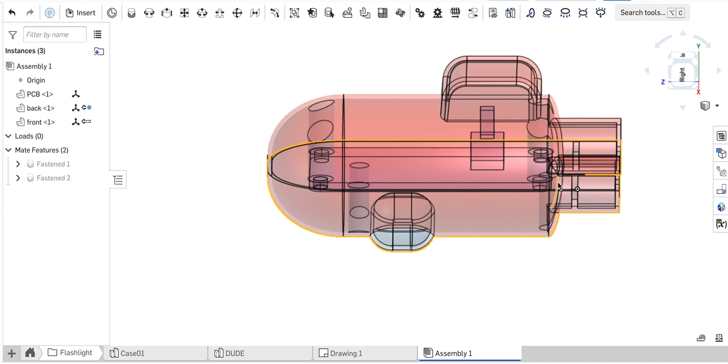So another great tip here, using a drawing to help you decide how to create your parts. So if we come and look at the assembly here, you will notice that the button doesn't quite match up with the backpack, right? It's a little not centered. So in my mind, I want to move the backpack up higher, so this is more centered. Okay, it's not very much off, but you know, I want it to be a little better.

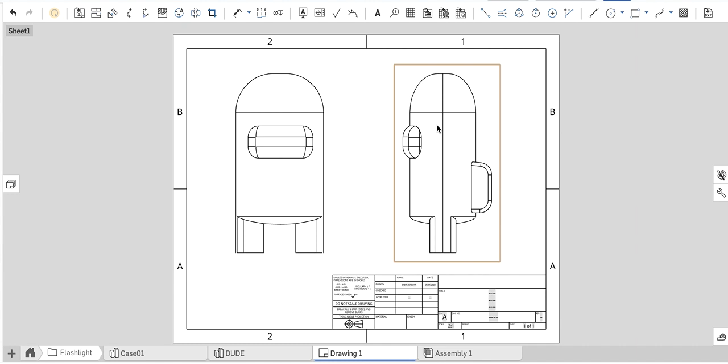So how much do we move that to get it lined up? How do we measure that? It's tough. Here, I don't know how I would. So in a drawing, if you create a drawing, so here I have a drawing, the side view is going to give us that info. This is the assembly I put in my drawing. And if I right click the side view, I can show hidden lines. So now I can see the orientation of the switch to the backpack.

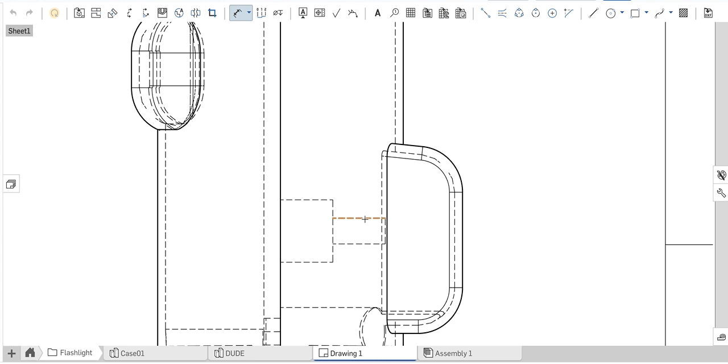So if I put a dimension from the, let's say the center point, I would love the center point, but let's say from the top edge of the switch to this top edge of the flat section here, I have 0.096. Okay, so that's one dimension. Now if I put another dimension from this edge to the bottom edge of the flat, I have 0.161. So you can see that the switch is not centered, right? There's a difference between these two.

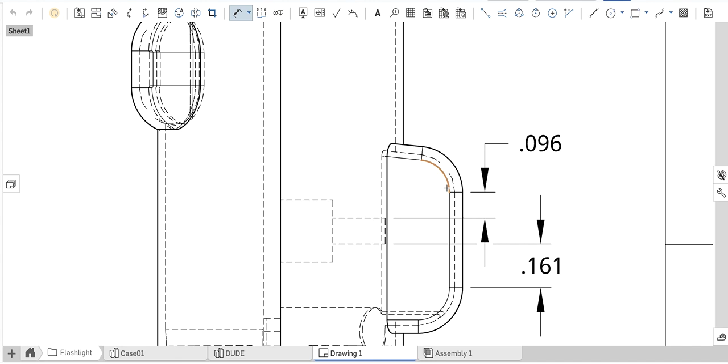So if I take out my handy calculator and I go to my mathematical skills and I find the difference between them, 0.161 minus 0.096, the difference is 0.065. So I need to move the backpack upwards half of 0.065, half of the difference. Okay, so 0.0325. I need to move the backpack up 0.0325.

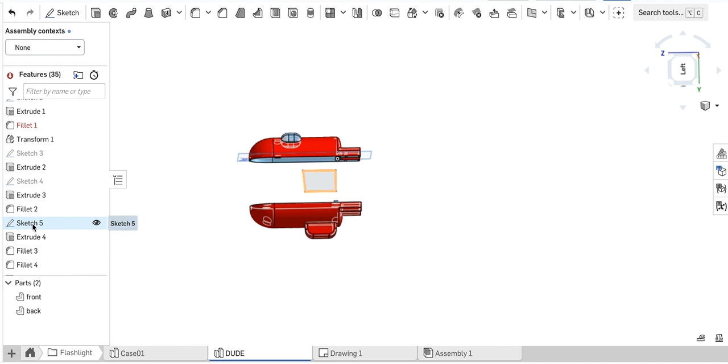So let's go to the dude. Here's the dude. Okay, and I know where the sketch for my backpack lives. It's this sketch here, and it's sketch 5. Okay, so let's go to that sketch. Now I think I did it in some random position, right? So let's see if we can add a dimension here, from here to here. This may not be as easy as I hope, but we're gonna try.

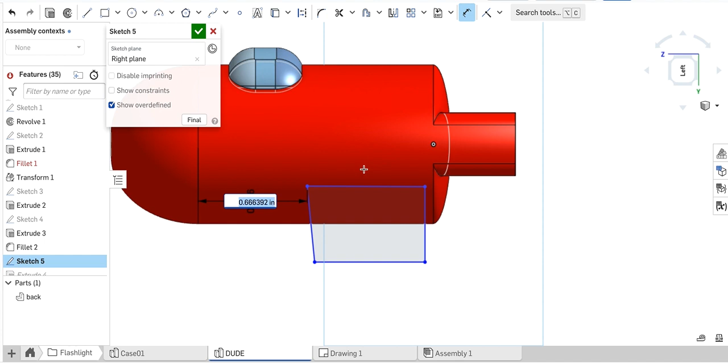Let's pick something, how about this line to this point? All right, 0.66666. Okay, let's also dimension this line. Let's add some dimensions so the backpack itself doesn't change. That looks good. Add this dimension here, dimension between these two. Right, so we want to define that sketch pretty good. Let's dimension this angle here. We're adding a bunch of dimensions so that way when I move the backpack, the backpack doesn't change.

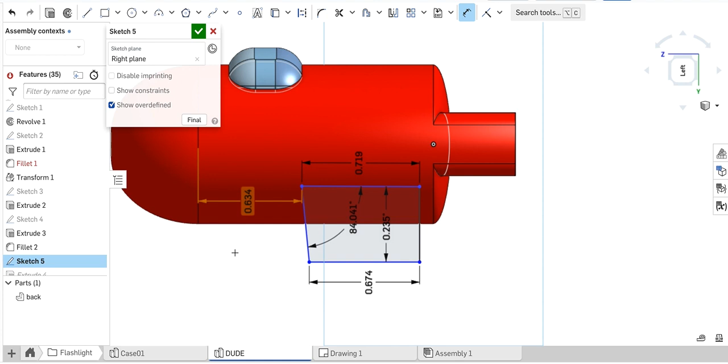All right, so this is the dimension that we want to take down. We want to move this whole backpack. So it's going to be 0.666 minus 0.0325. Fingers crossed over here. Boom. And you saw the whole backpack move upwards. Okay, so we shifted it up. Now I'm going to accept that sketch, and I'm going to hope everything regenerates cleanly. And it looks like it did. It's still got a backpack there. Okay, so that's pretty awesome.

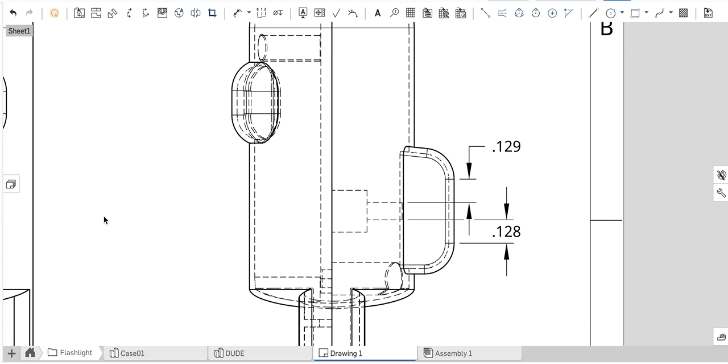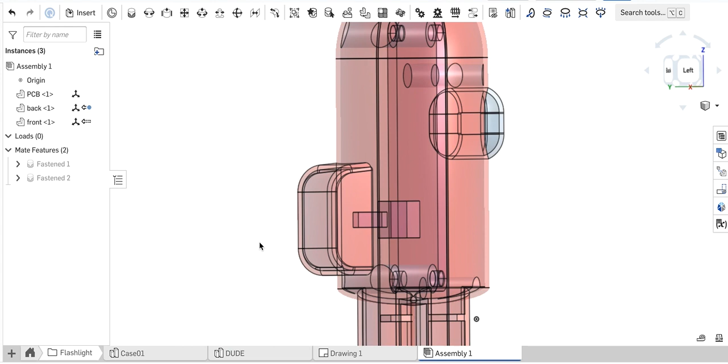Now I'm going to go back to my drawing and I'm going to regenerate my drawing here. See right here, I'm going to update it. And we're going to hope that these two dimensions are now matching. Oh yes, so we are good. 129, 128. That is good. Okay, we've nailed it. So using the dimensions that we can get with a drawing can help us design and modify parts in the Part Studio. This assembly should look the same, and now when we look at it from the back view, we will see that our button is very much centered in there.

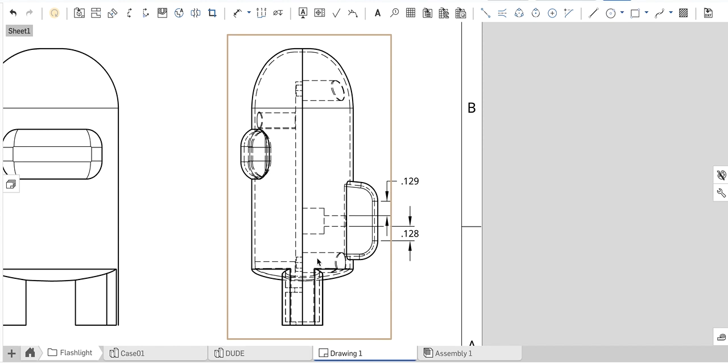So now I'm going to make another context edit and cut the hole for the button. Another thing that's handy, how big to make that button? Well, where do we go to get that dimension? Go to our drawing right here. So now I can see that the dimension from the top of that button pin, right, to here is 245. Right, so that helps us design the actual button itself, so that way the button sits through, sticks out a bit, and everything works well.

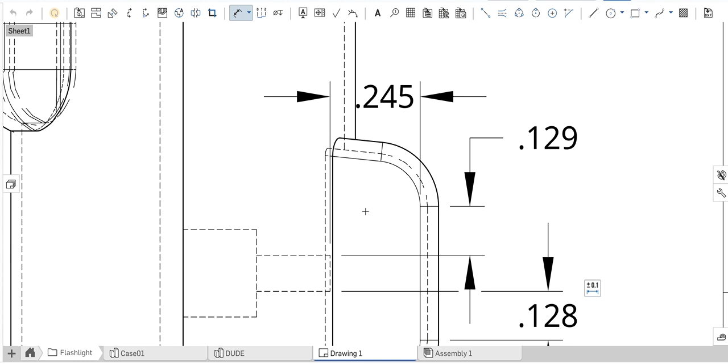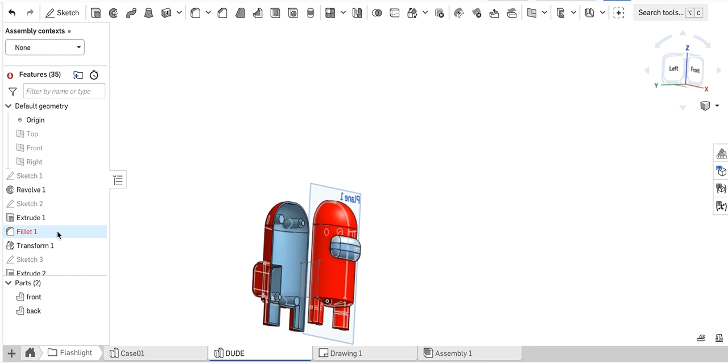Thinking this through, the whole backpack being the button would be awesome, but that would require massive changes from the Part Studio. So I'm going to try that actually. Let's see if I go to Split. If I make this a new part, or is that going to mess too many things up? Make it new. It's a new part, all right.

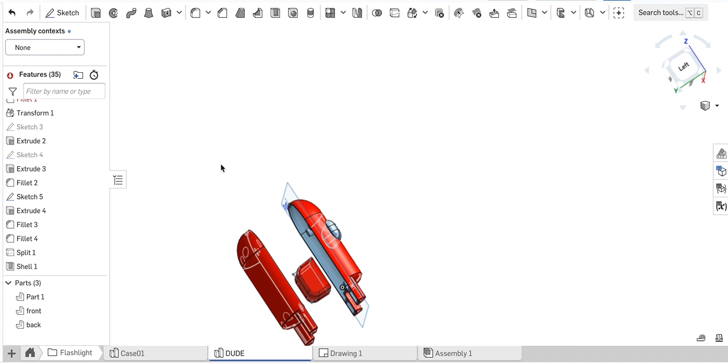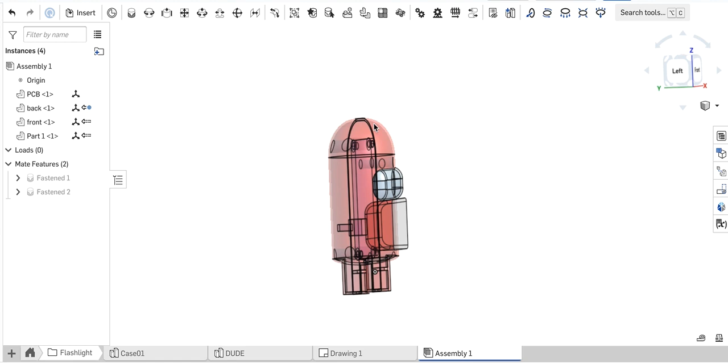Let's go to my assembly. All right. I don't know if I'm going to do it that way. Part 1 is the backpack. There it is. I could cut a hole out the size of the backpack. I'm halfway there. I think I'm going to try to make this work this way. All right, but the idea of using the drawing to get those dimensions, super awesome.